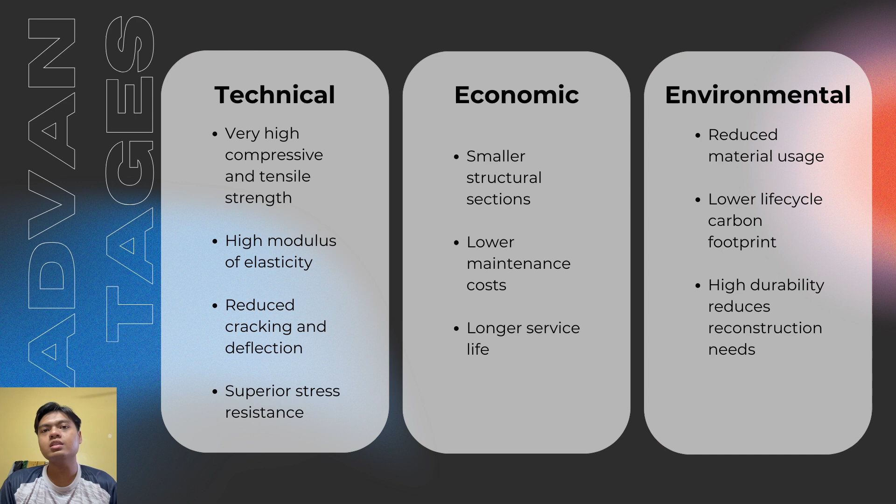For the product advantages, the main advantages of the MAHA³RD-HARD series are high compressive and tensile strength, better stress distribution and crack resistance, reduced structural size and deformation, and longer service life with lower maintenance costs. These advantages make the product suitable for bridges, high-rise buildings and precast structures.

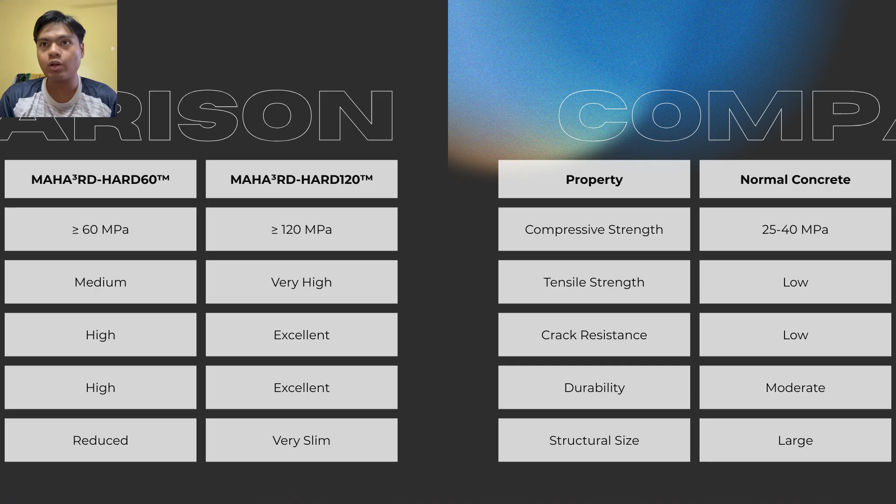In the international market, similar products include Ductal by Holcim, Sikacrete UHPC by Sika, and Vertua Ultra by Cemex. Locally, most competitors supply normal or conventional concrete, which has lower strength and durability. Compared to this, Mahat Hut offers higher performance than normal concrete and a more economical, locally adaptable alternative to imported UHPC products. In conclusion, Mahat Hut provides a strong, durable and competitive solution for high-stress civil engineering applications.

So that's all from me. So proceed to the next part.

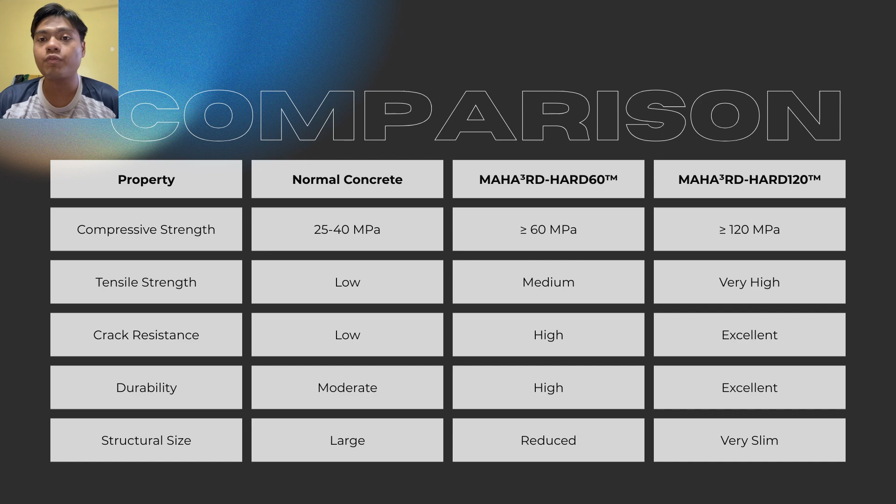Thank you. I will explain the material properties and the technical specification. For the properties, we divide them into four parts: yield strength, ultimate compressive strength, tensile strength, and modulus of elasticity. For the yield strength, both MAHA³RD-HARD60 and MAHA³RD-HARD120 have the same yield strength for the steel bar, which is approximately 500 megapascal. For the ultimate compressive strength, Mahat 60 has 60 to 90 megapascal, while Mahat 120 is between 120 to 180 megapascal.

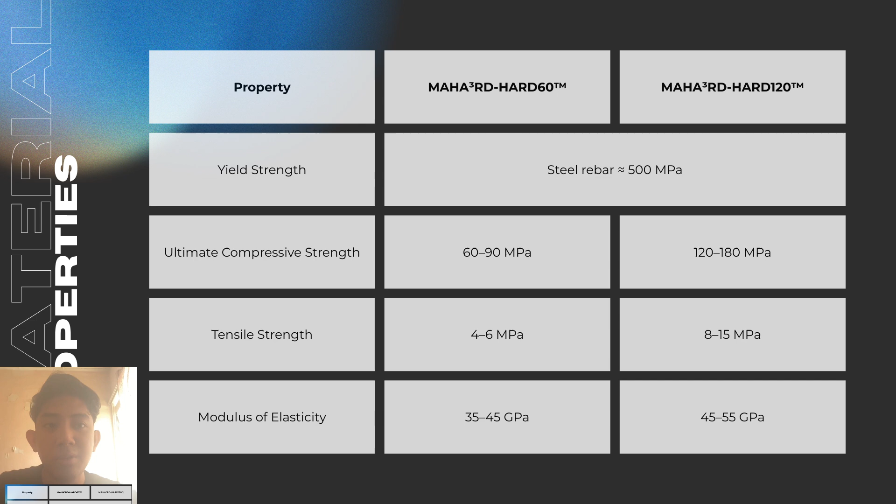For the tensile strength, Mahat 60 is around 4 to 6 megapascal, while Mahat 120 is around 8 to 15 megapascal. And lastly, for the modulus of elasticity, Mahat 60 is around 35 to 45 gigapascal, while Mahat 120 is around 45 to 55 gigapascal.

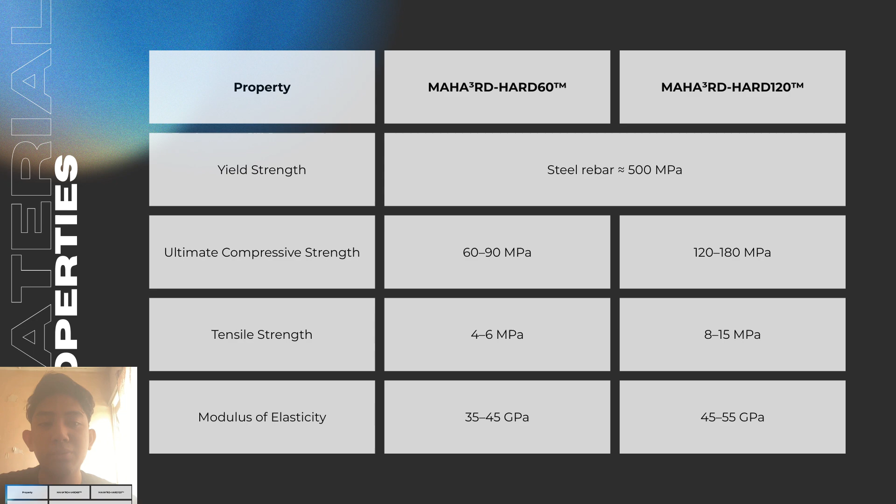For other properties, the density is around 2,400 to 2,500 kg per cubic meter. The thermal expansion ranges from 10 to 12 × 10⁻⁶ per degree Celsius. For ductility and brittleness, HARD60 is brittle, while HARD120 is pseudo ductile. The permeability is very low, and lastly the shrinkage is minimal.

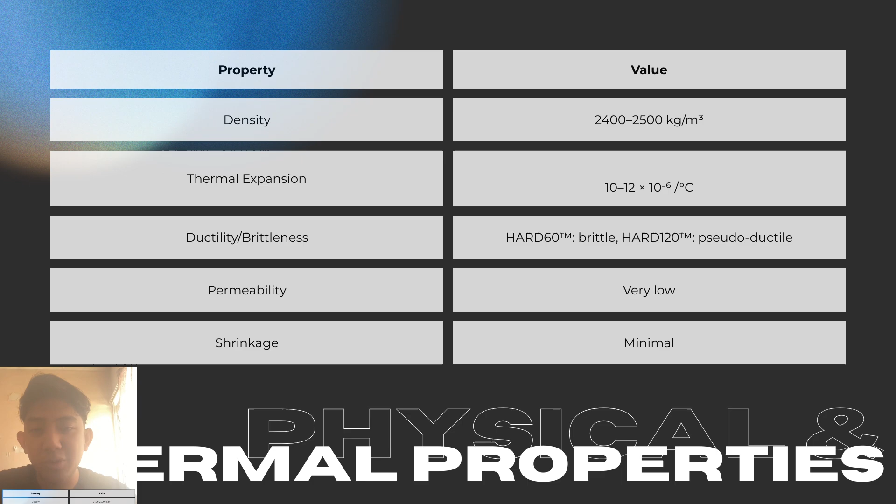Next, I will explain the implementation, application and process of MAHA³RD-HARD concrete. This high performance concrete is designed for high stress and ensures structural safety, durability and efficiency in modern construction. The concrete is used in real applications such as bridges and columns, and it shows the ability to withstand high stress and high compressive load.

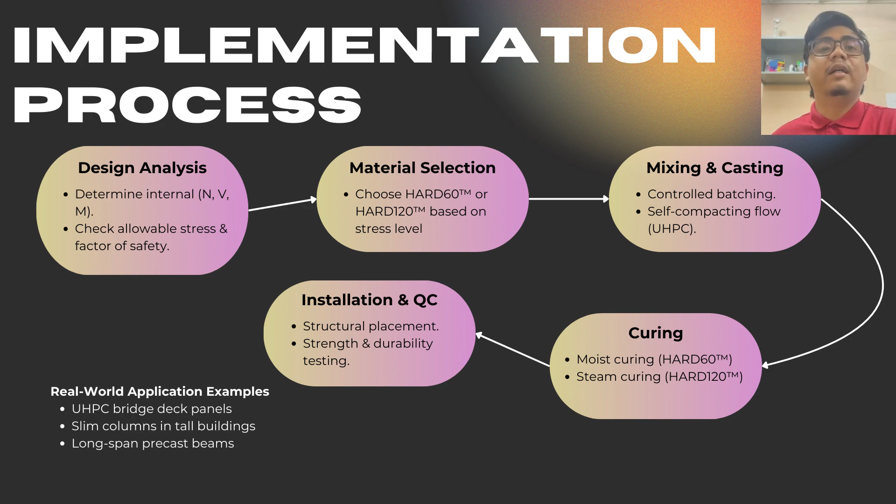The implementation process starts with design analysis, where internal forces and allowable stress are checked. Next is material selection, where HARD60 or HARD120 is chosen based on the stress level. Then, the concrete is mixed and cast using controlled batching, followed by proper curing to achieve the required strength. Finally, we install and carry out quality control to ensure structural safety and performance.

In conclusion, the implementation process ensures that Mahat concrete achieves superior strength, durability and structural integrity, making it suitable for demanding applications such as bridge decks, high-rise buildings and long span beams.

So thank you everyone. I would like to say that through precise design, advanced material engineering and strict control, Mahat HARD concrete can deliver exceptional structural performance to ensure maximum safety and long-term durability.